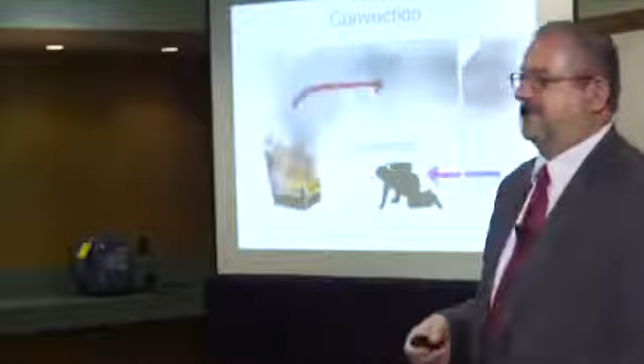But notice where the high heat, high pressure gases are exiting out the top. So one might imagine that if you were where the red arrow is, that could be bad, right? The heat transfer to you is going to be increasing. So if the hot gas layer comes down to where you are and is flowing over you, you're in trouble.

Conduction. A lot of times we just think about conduction being where you're touching something, your gloves on the floor or on a hot surface, or your knees crawling on a hot floor. But the other thing to remember is, how does your gear protect you? Your gear protects you by absorbing energy and storing it. And then what happens? The gear gets pretty hot. What direction does heat flow? Hot to cold. What's the next cold thing? You inside the gear. So at some point, the gear that's pressing against your skin is going to be conducting into your body. So when your gear's hot, the last thing you want is to have it compressed against your skin.

If one of your fellow firefighters gets his trim on fire and you have the temptation to pat it out, you're really not helping him, right? You're going to push the hot gear against the skin and make the burn injury worse. Cool them off. Throw water on them, get the gear off. You've got to get the heat moving away. You want to change the direction of the heat from going to him to going away from him, somewhere cooler.

Firefighting thermal environments. So in the green box there, on the bottom we have heat flux, kilowatts per meter squared, and that's again this radiant energy. And vertically we have air temperature, which will control our convection heat transfer. So we've got convection on one side, radiant heat transfer on the other side. And the key thing to remember is that these two sources of energy from the fire add up, right? If they're absorbed in your gear, they add up.

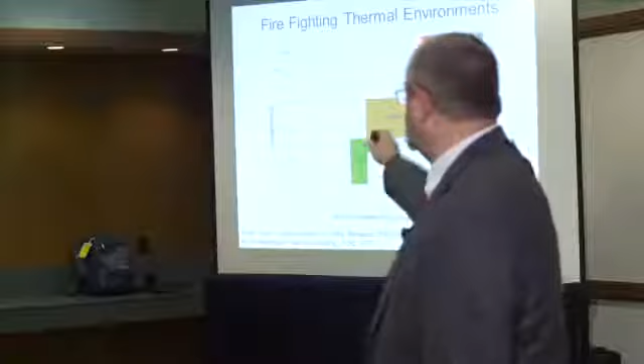So routine case, 1 to 2 kilowatts per meter squared, and up to about 140 degrees Fahrenheit is sort of the routine case. That means your gear can protect you probably for on the order of 10 to 15 minutes under those type of steady state conditions. We get into the ordinary case, and that starts at our sort of 2 kilowatts per meter squared and 140 degrees Fahrenheit, and goes up to a peak of 400 degrees Fahrenheit and about 12 kilowatts per meter squared. Once we get to that upper corner of ordinary, now you're sort of in that kind of 2-minute range of protection.

But part of this depends on how hot were you before you got in that condition, right? And then we have the emergency condition where we're kind of considering that less than a minute, right? You need to be making your way out of that space or changing the condition of that space pretty dramatically under those sorts of situations.

So I'm going to show you a couple of films here. We have a chair that weighs 42 pounds. I've got 2 of them in there, polyurethane foam and polyester batting. And here I've got 1 window and 1 door to this compartment that's about 12 feet by 10 feet by 8 feet tall, and the door and the window are both closed. And you're going to watch the fire develop, you're going to watch the smoke grow, and just under the window you saw a couple of squares on the wall. That's firefighter turnout gear that we have instrumentation in.

So the smoke layer comes down over the firefighter turnout gear. What's happening to the fire right now? Starting to run out of oxygen. The hot gas layer is coming down below the level where the fire can entrain fresh air. So if we don't do something quick, that fire is going to go out. It got hot, it started to build a little pressure, smoke started to force its way around the cracks in the doors. You see it pushing out there a little bit. So we're going to open the door.

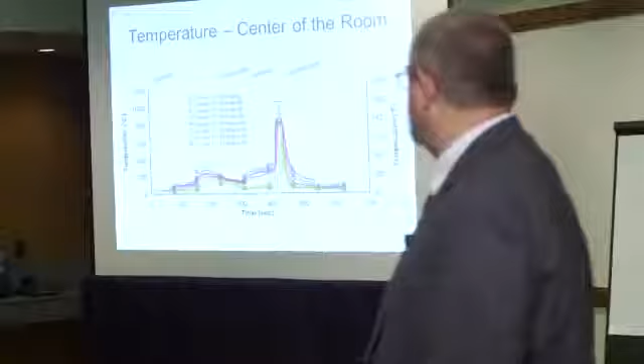So here we have a graph. I'm going to show you a number of graphs. So basically we've got the temperatures starting from 1 inch below the ceiling, the blue line. Then we come down a foot, and then they're every foot until we get to 1 foot above the floor, which is that sort of neon green line. So you can see that we got to temperatures on the order of 300 degrees Fahrenheit, 1 foot above the floor, within about 3 minutes of ignition. So what's that tell you about occupant viability if somebody happened to be stuck in that room?

Not very good. Notice how the temperatures drop off a little bit until we open the door. Now notice what happens to the graph once we open the door. The conditions separate, right? And you saw it in the video. We once again have a hot gas layer and a cool lower layer. So the temperatures 3 feet above the floor and down, where you would be crawling, are ambient conditions.

They're 100 degrees, just as it was that day when we were running the test. That's the outside air conditions that you'd be exposed to. And life is good, perfect working environment, fully encapsulated in your gear. You're well protected to work under those conditions. You have a little bit of heat flux hitting you, less than 5 kilowatts or so. Life is good until what happens?

Until rollover. Once that rollover occurs and we've got flames rolling the ceiling, the radiation kicks up, the convection kicks up because the hot gas layer comes down, and you see how rapidly conditions change. We go from you being in a safe environment to you being in an untenable environment in about 20 to 30 seconds.

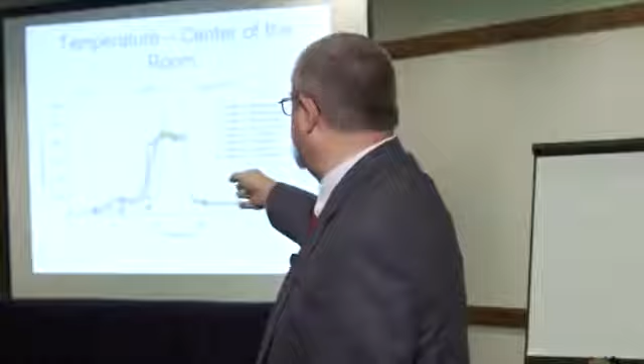So there we see our thermal gradient, our temperatures again from the ceiling down to the floor. Initially, we have temperatures at the ceiling sitting around 390 or 400 degrees. Near the floor, they're ambient conditions until we have rollover. You see they rapidly increase until we reach post-flashover, which would be defined as temperatures in excess of 600 degrees C or 1100 F. That also happens to be the auto-ignition temperature of carbon monoxide.

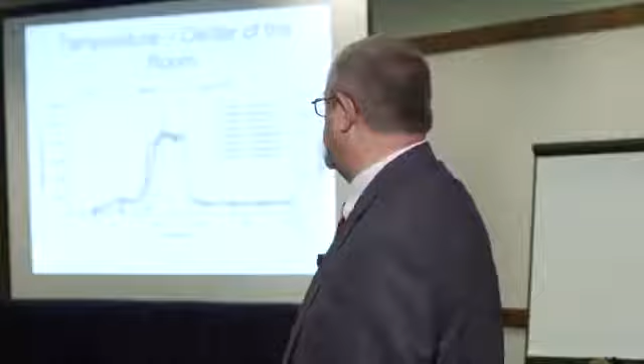So we're sitting at temperatures floor to ceiling in that space around 1500 degrees Fahrenheit. Notice introducing the hose stream from outside drops the temperatures very quickly to about 200 F. Heat flux, again, now we're up to about 75 total heat flux. The radiant heat flux is up to about 30 because we allowed it to transition to flashover.

The PPE temperatures, again, you're okay. The outer temperatures are below 200 degrees Fahrenheit. Inside the gear is less until we have rollover. So when did the hot gas layer come down over the turnout gear? At around 180 to 200 seconds. Well, there you can see it in the graph. Right, so as soon as those hot gases start impinging on your gear, your time of safe operating is gone. You need to be moving or changing the environment.

Flow path. So basically, flow path is the volume in a building, a series of rooms or hallways or corridors or stairwells, that's between an inlet and an outlet. So I got some gray hair in here, so some of you guys might have been hot rodding back in the day, right? So if you consider the fire structure as your internal combustion engine, and your inlet was your carburetor, and your outlet was your exhaust system, if you wanted to get more energy, more horsepower out of that car, what did you do? First time you got your check from working at Safeway or whatever, what did you do?

You had to go get some hooker headers, man, and some glass packs. Got to let it breathe, right? Got to open up that exhaust. Got to get that Holley 750, you know. You got to get that big carb on there to increase the flow path. Make the engine a better air pump and fuel pump and let it burn better. Well, that's really what we're talking about here with the structure.

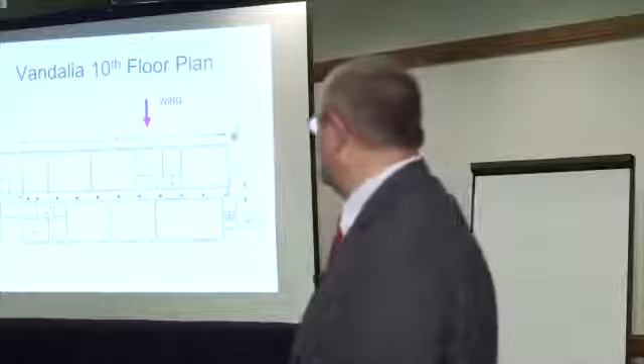So the first hose crew gets burned, they can't advance the line. Eventually, they advance a 1.75" line and a 2.5" line down the hall, and unfortunately not in time to save the other members. So this is what the hallway looked like between the fire apartment doorway and the attack stair doorway. This is looking from the front door of the apartment into the apartment.

So you see that the apartment, although it wasn't heavily furnished, it had a sofa or two in it, and basically a wood dining room set, again lightly upholstered. It had burned long enough it got back into the wall and picked up some foam insulation that was burning on the outside wall as well. It burned hot enough that it spalled the ceiling planks that formed the ceiling of this apartment. So a lot of energy was released.

So before our Fire Dynamics Simulator even had its name, we ran a model with it. The blue box represents the wind, and the fire apartment is right in front of the blue box there. And this is the little old man's apartment, and then of course we have the stairwell on the opposite side. So what you'll see is when the window breaks, the fire size is going to increase and smoke is going to start to move down the hall.

And because the roof man said that the flames were pulsing in and out of the window, I assumed that the wind was fluctuating. So when I modeled it, I had the wind go up to 20 miles an hour and then back down to 0. So every time you see a wind pulse in the model, flames and heat will move down the hall.

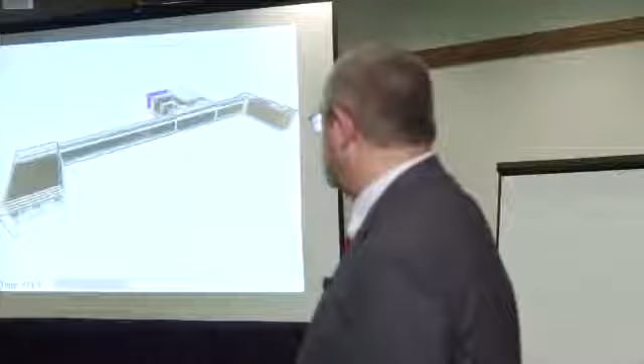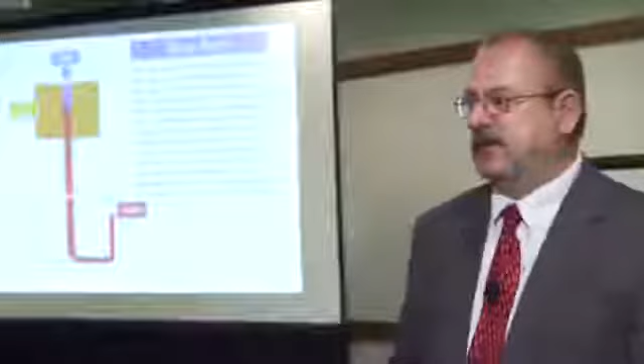So 10 years later, we get an opportunity to run a project to really study this wind-driven fire phenomena. And as I described a little bit earlier in the class, we have this flow path where basically we have the bedroom, we have a hallway, we've got a target room here, there's a hollow core door between the target room and this hallway, and then the living room and our outlets, non-flow side and flow side.

So I'm going to go through this again quickly, reminding you that you only need one piece of furniture to flash over, to have enough energy to flash over a typical residential scale room. And we'll watch this video again. So again, our fire starts here in the bedroom. We have our plume starting to impinge on the ceiling. Ceiling jet moves across the ceiling.

Once it hits the walls and forms the hot gas layer, it starts to build up in depth and then spread down the hallway and into the living room. And notice that when it starts to flow out the doorway into this corridor, it's going to head for this vent, right? The flow is very directional away from the camera toward the vent, part of the flow path.

Right now, if you were to get there right now and start to make an attack and work your way down the hall to get to the fire bedroom, this is sort of that old school early growth stage. You're there in time. It hasn't gone into a decay stage yet. But now that's transitioning to a decay stage.

And as soon as this window, which might fail accidentally or might be ventilated as a ventilation tactic, look at what it does in that hallway. Right? It's no longer a hot gas layer, cold layer environment. Now any firefighter that would be in that hallway is in that hot convective flow. Heat transfer to that firefighter increases dramatically.

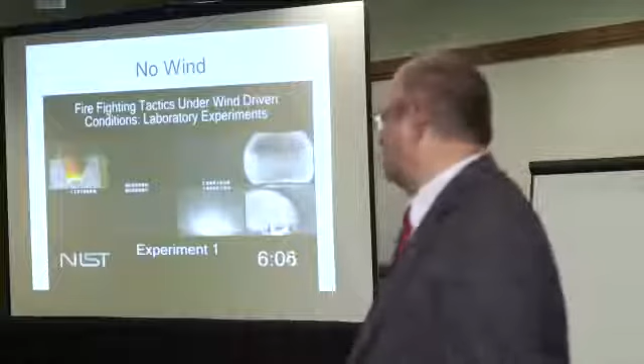We're going to watch the hollow core door fail. Interestingly enough, until that door fails, somebody would have a chance of surviving behind that door. Right? So from a victim's perspective, having a closed door, doing whatever compartmentation you can, is a big value. Notice how that flame is pulsing in and out. Now this is with no wind.

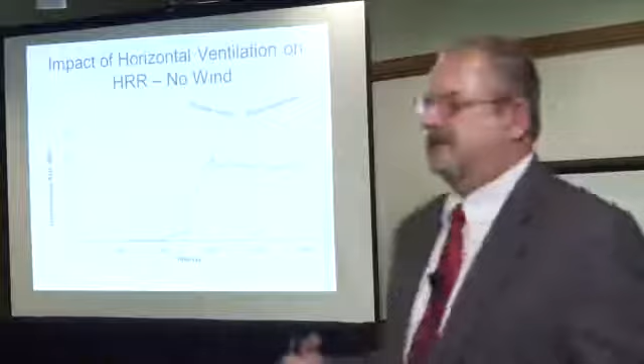So again, very dramatic increase in heat release rate. It goes from about 2 megawatts to 13 to 14 megawatts within 60 seconds. The bedroom temperatures: initially, we had over 1,000 degrees at the ceiling and about 500 degrees at the floor. Once the windows vented, now floor to ceiling, we're post-flashover. We have a very well mixed fire going from floor to ceiling in excess of 1,100 degrees Fahrenheit, and it stays that way until suppression.

The living room temperatures. So what's happening in the living room is there's not really a lot of fire in the living room. Why not? There's temperatures at the ceiling that are about 700 degrees. They're pretty warm. So what's going on is the temperatures and the heat flux in the living room are hot enough to start to pyrolyze the furniture and the carpeting that are in the living room. So gaseous fuel is being created, but it doesn't have any oxygen down there to burn.

Then when we vent the window, it starts to pick up some oxygen, but it's still burning pretty inefficiently because, you see, we're not post-flashover yet. We still have a temperature gradient, although now the ceiling temperatures are about 1,400 degrees Fahrenheit, and near 1 foot above the floor, it's about 800 degrees Fahrenheit. When that door fails to the target room, the chunk of oxygen that's stuck in that target room gets pulled out into the hall, and that's what causes this increase in temperature here, and then we sort of transition to our flashover state.

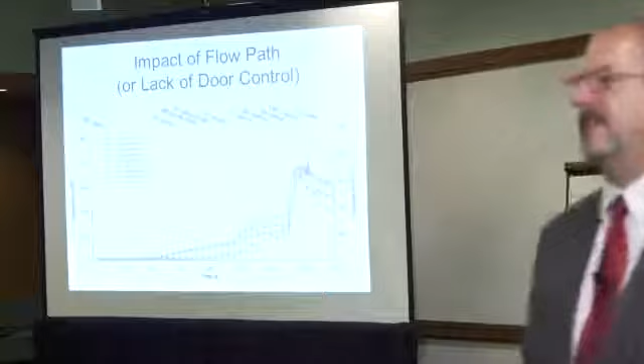So again, now we're working with the fire service. How would you attack this fire? Well, we're going to go in, we're going to open the lobby doors, chock them open. We're going to get to the stairwell, attack stair, we're going to chock it open. We're going to go upstairs, we're going to open the bulkhead, or we're going to get our attack crew set for the stair. And then we start changing it to see how we could make it better. In this case, this graph is just showing you temperatures in the corridor between the fire apartment, which has an open door and wind blowing in the fire apartment, and the bulkhead and the stairwell door.

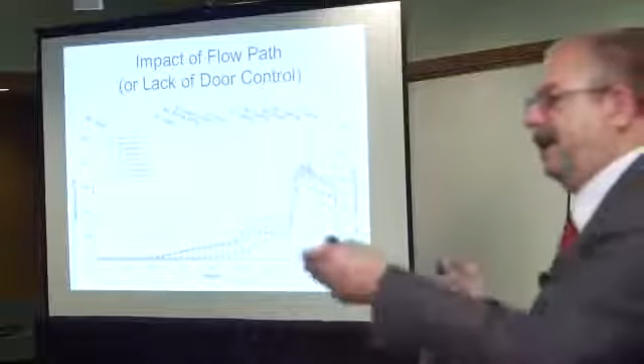So this is stairwell 7, the door's closed. The bedroom window is failing, so now we're going to have the wind having an impact. They open the stairwell door a little bit, and you see the temperature in the hallway increase as they start to complete that flow path. Then they open the stairwell the rest of the way, and we open the bulkhead, and that provides our exit.

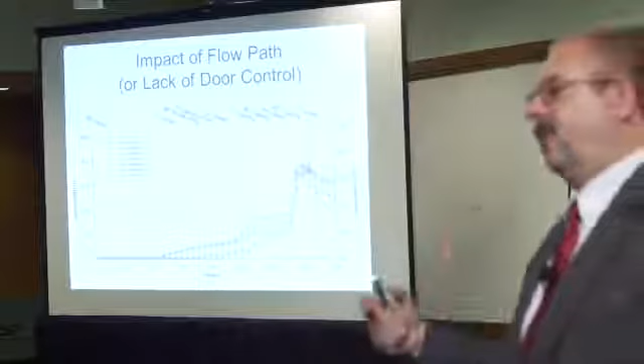We open the damper on the end of the exhaust in the wood stove, and you see how rapidly the temperatures in the hallway outside the apartment increase from something that might be tenable for a firefighter to work in for a short time to something that's completely untenable for a firefighter in full protective clothing. And you see the time it happens. Each one of these marks down here is 10 seconds. So it's happening in the space of less than 20 seconds.

Very rapid transition. This isn't just a high-rise issue. Single-family homes. Here's an incident that happened in Houston. Killed a captain, very experienced captain, more than 25 years on the job, as well as a young firefighter who was 30 days on the job, and this was their first fire.

The wind was coming from the rear of the structure, and there was so much smoke in the street in front of the house, and when the fire department arrived, fire sort of happened in the middle of the night, the engineer stopped because he didn't want to hit any parked cars. He wanted to get a better view of where he was going. And then he took the apparatus down the street past the house. They hooked up to a hydrant, and the lines start going in the front door on the downwind side.

Now, this was a very difficult house to gain access to the rear. Again, some confusion about whether people were in the house or not. In fact, the occupants were out of the house, and they had opened the garage door to the house to get their cars out. So again, another opening on the downwind side.

So here's the front door. The nozzle from the victims was found here. Their line went down the hallway. Their nozzle was found here. And the 2 firefighters' bodies were found in this location here, so they were well off their line.

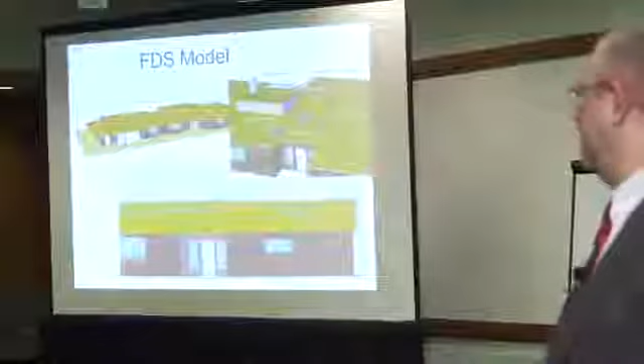As soon as they were done with their cut and punching down the ceiling, he looked back again, and now he saw that that flame overlapping the eaves was about 20 feet wide. Well, that's because all that glass, solarium glass, had failed. So again, we're modeling this fire to try to get some understanding of what the flow path looked like and what happened. In our models, we include the roof vents. We try to get the whole timeline down for when they're pulling the ceiling and that sort of thing.

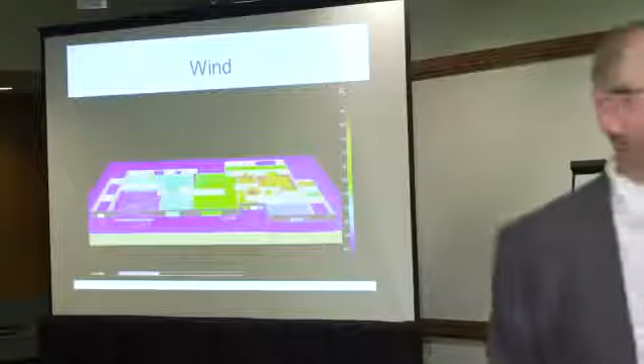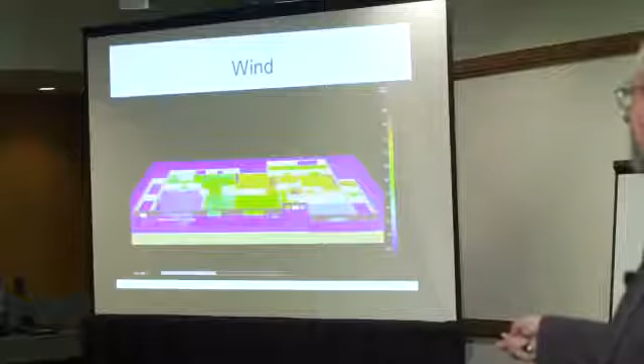And this is what it looks like. So the graphic on the side, anything that's red or above is 500 degrees Fahrenheit or above. So not healthy for a firefighter. Our slice line here is about 3 feet above the floor. Here's our garage door that's open. The door between the kitchen and the garage was also left open by the occupants. And then this is the door the firefighters are going to open to make entry. The wind is coming from this direction.

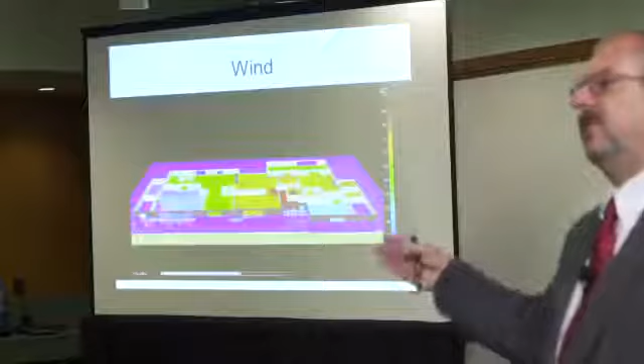So the front door is open. They open the door, and then what? Well, you got to get your mask on, get your helmet on, whatnot. Again, this is an issue. When are you making the vent? Right? You don't want to vent till you're ready to take some action. Or if you're going to open the door and take a look and you see conditions aren't so good, close the door again. Right? Don't allow the fire time to build up by entraining more air.

So things are heating up. In fact, opening the door, you're going to see when they make the roof cuts right in the foyer area, it'll cool off a little bit. They'll get a little bit of lift. So now the roof is vented. It cools off a little bit in this area.

Things are working. And then the glass fails. And now you see where the heat's going. So they couldn't stay on their line and follow their line out probably if they wanted to. They went to an area that was not as hot. It just wasn't cool enough for them to survive.

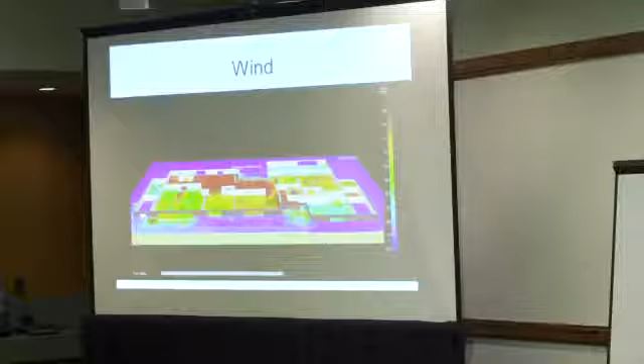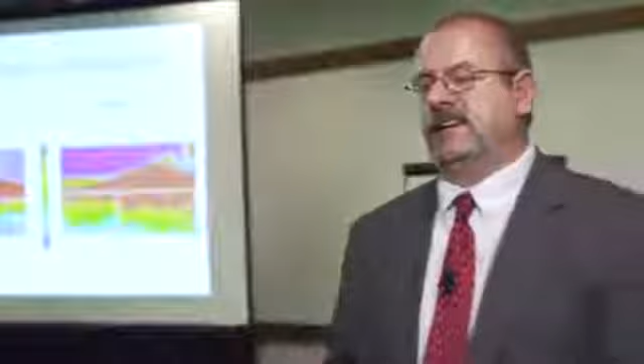So this is a side view looking at the front entry. So the view on the left is before the wind is impacting it. So you see it's cooler, close to the floor. You could crawl in and under there. Once the wind is blowing through the house, it's dropping the heat, it's mixing it toward the floor. You can't get low enough to get out of the thermal flow. And perhaps more importantly is the velocity of that hot gas.

Before the window breaks, 3 feet above the floor or so, fresh air is being entrained inside that front door, bringing cool air into the house, also feeding the fire. But if you're in the location of the doorway as a firefighter, it's going to help you. It's going to help keep you cool. Once the glass breaks, notice what happens. The flow reverses and hot gases are coming out at that same location. Again, no escape.

So wind. Keep the wind at your back, stay upwind. Otherwise, you're literally putting your crew at the mercy of whether this glass that's less than a 1/4 inch thick is going to break while they're in there, or whether somebody from another company in an uncoordinated manner makes a vent and puts them in harm's way, puts them in the flow path.

Again, just a top-down view. This is the direction of the wind out to the front door and out through the garage. So they couldn't go this way, they couldn't go this way. There were security bars on the windows here. They got to the best place they could and couldn't get any further. Again, you'll see where the flow path is because that's where most of the burn damage will be, because that's where the oxygen's mixing with the fire.

So it brings us to some questions about ventilation. Can you really vent enough? So here was an incident that occurred in New York City. Rob Weedman was burned in this incident, as was firefighter Gersbach. And the fire started upstairs in the rear. The fire marshals from New York City said that it was a hair roller, curling iron that was left in a pile of clothes, started on fire.

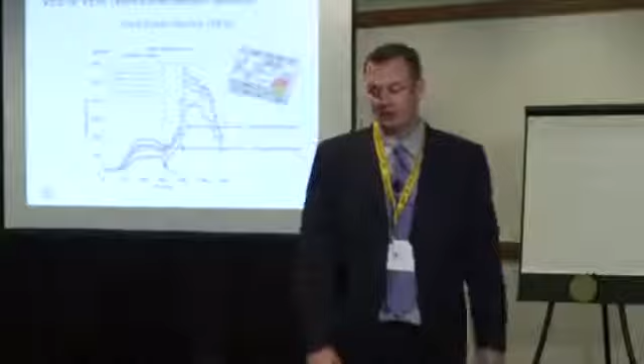VES, or as people bash me for, VEIS. Apparently putting an I in there ruined the fire service. My argument would be, well, let's take the E out because everybody knows if you vent, in order to search, you have to enter. I don't think everybody's teaching that you need to isolate that door. And I think putting the emphasis on that isolation is extremely important because if you don't isolate that door, you put yourself in the flow path.

The problem is you put yourself in the opposite end of the flow path. So now even if you're a level above, like we show in this scenario, you're trying to crawl down the chimney. And I think we've got the video here that we showed this morning.

How many people have a VES? How many people have a VES SOP? A lot of you should. There should be more hands because there's going to be the scenario where you show up and there's a credible rescue that needs to be made. There's a person right there in that window and your people need to know how to do that.

They need to know. And one of the things that I see taught all the time that scares the heck out of me, people teach throwing the tip of the ladder through the window. And the problem I have with that is the moment the tip of that ladder goes through that window, the clock started. And that clock is how long you have to get that door shut before you made that room untenable for the person that's in there and any firefighter that's trying to enter into that window.

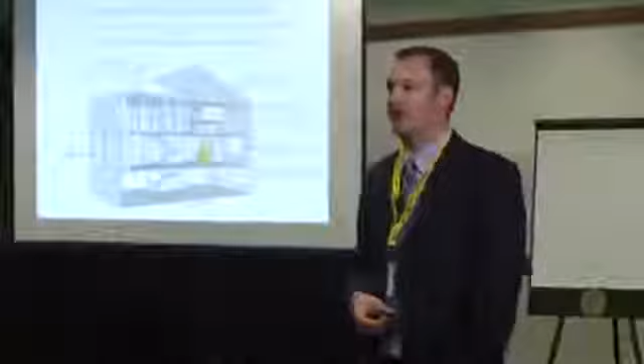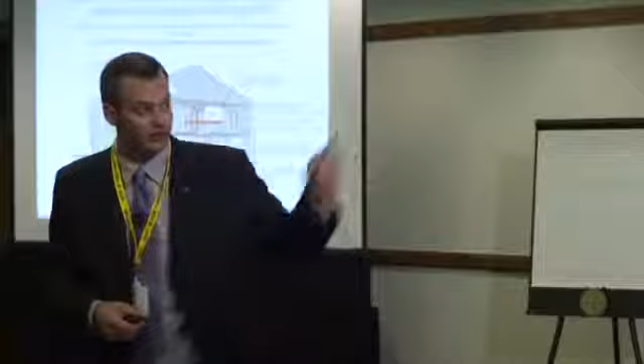Dan talked earlier about convective flow. That 170 at the floor with a 12-mile-an-hour wind feels a hell of a lot worse than 170. But with 0 miles an hour and 120, you're now talking something that you can operate in. Best chance of victim survival and firefighter survival is behind a closed door. You can have, and Dan and I have seen this on many experiments, the entire front half of a structure absolutely blowing fire. And if somebody's behind a closed door, let's say on the CD corner, there's a chance that there's a savable life inside that room. They put a closed door between them and the fire.

Same thing happens if everything goes to crap on you guys and you find yourself having to bail out. One of the best things you can do to buy yourself time is to get a closed door between you and where the fire is. Takes you out of the flow path, allows the room that you're in to actually ventilate and allow the smoke to lift. And if you get to a window, you actually have time until that door burns through to have someone get a ladder to you and allow you to go out through that window.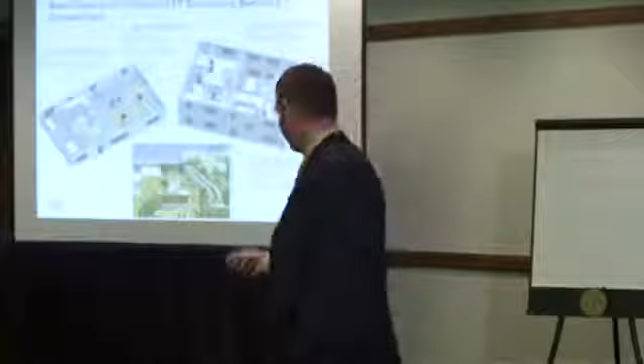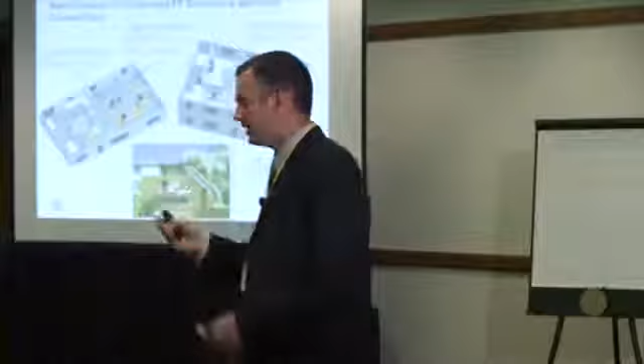We've got a number of cases where firefighters have bailed out through windows on upper floors, and the thought of closing a door wasn't in their head. They're thinking, this is so bad, I got to get out that window. And I've never been in that situation, but I can imagine the last thing you're thinking of, unless you train on it, is getting a door shut. There's been cases where firefighters have waited for their comrades to jump out of the window while they sat there and cooked with the door 8 feet from them, and the thought process was not there to get that door shut to buy them a little bit of time.

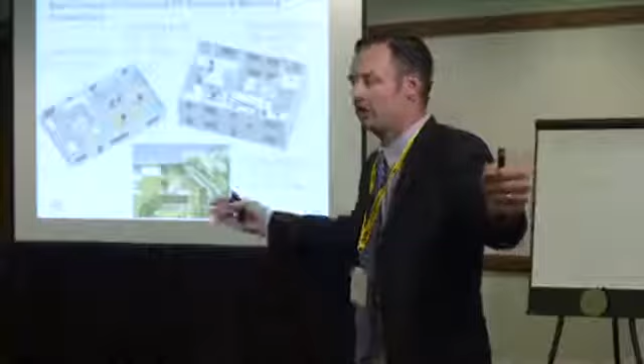Vertical ventilation. We actually wrapped this series of experiments up. The online training program is finished, and we're going to release it next week. So keep an eye out on our website. There's going to be a new online training program that addresses the vertical ventilation stuff.

And for anybody that thought, well, UL's going to tell us not to vertically vent anymore, UL's going to tell us that it's useless. No. That's not what we're telling you. What we're telling you is if you choose to vertically ventilate, here's what's going to happen. If you choose to do it this way, this is what you might see. Here's the timeline of which things happen.

In this video, what we're showing is the impact of different hole sizes. And the learnings out of this are no different than horizontal ventilation. I don't care how big of a hole you make. There's so much fuel, and it's so fuel rich, all you're going to do is make the fire bigger, unless you apply water or unless you control the air.

So in the one on the left, we open a 4x4 hole, or 16 square feet. The one on the right, we open a 4x8 hole, or 32 square feet. What you're going to see is air comes in low. In one scenario, we get flames 15, 20 feet out of the roof. In the other scenario, we get 15, 20-foot flames out of the roof. And we get fire out the door. The fire is producing more energy than you can let out, even with a door and a large vertical vent.

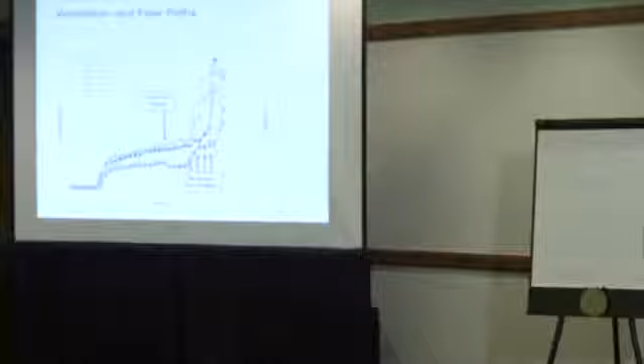Ventilation and flow paths. If you're not going to die by falling through the floor, the next chance of dying is being in the flow path between the fire in the basement and the first floor. How many people have made it down the stairs into a basement fire and put a basement fire out? I would hope a lot of hands go up, right? We've been very successful doing that. But do you know why?

Either the fire was small, it ran out of air so it wasn't that big, or the basement wasn't ventilated, so it was kind of like holding your thumb on the end of the straw and didn't allow the flow to come up past you because there was no air low. These are important things. You might be a piece of glass or one door being forced away from being caught in a flow path between the basement and the first floor.

We had a couple of brothers, Cherry Road in Washington, D.C., a couple of brothers, San Francisco, Diamond Heights fire, where they never opened up their hose lines. They got caught in the flow path above the fire or between where the fire was and where the fire wanted to go and got dropped and didn't get back up because a vent occurred on the floor below them while they were trying to find the basement stairs and make it down the basement stairs.

And this is what the temperatures did. In this scenario, they're going from about 250 to 1400 just by making some vents in the basement. And I think the common conception is, well, I'm going to let the hot stuff out of the basement, and if I let the hot stuff out of the basement, things are going to get better on the first floor. The opposite happens.

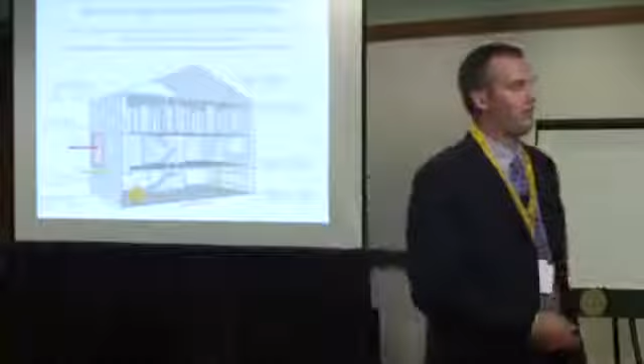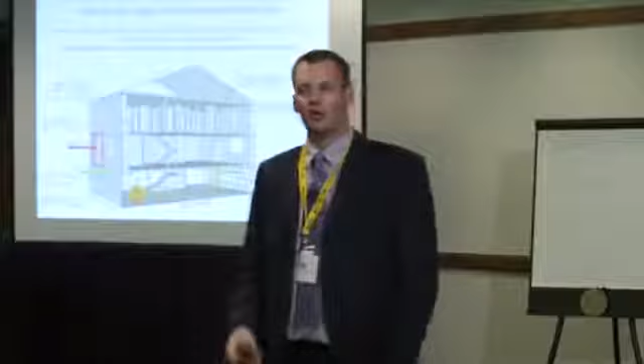We always teach that water expands 1,700 to 1 and creates a lot of steam. The piece that we don't focus on too much is how much the gases contract when you take them from 1,700 to 300, 800 to 300, 1,200 to 400. That many hundred degrees of temperature drop will contract the gases. So you don't get a giant burst of steam and heat and smoke up to the second floor.

And even if you did get some steam going up to the second floor, look at the temperatures at the top of the stairs, 600 degrees to 200 degrees. So you're seeing a dramatic decrease in temperature. The bedroom on the second floor, remember before it went from 225 to 210? It went from 225 to 190.

Now, because you have the upper hand, you can now vent that second floor and not have to worry about making it a low pressure and being in the chimney. You can vent the heck out of that place because you have the upper hand. You're letting more out than that fire can create. So more operations can happen simultaneously because you have the upper hand.

And another important piece of that is you're flowing water at that window to knock the fire down, not to put it out. You got to get inside and finish it off. If you flow water for 15 seconds and you knock all the gases down and the fire goes back to the contents, and you just sit there and think you're done, the fire will come back. Because you're not putting water everywhere, stuff is still burning. So if you don't get inside and finish it off, it's going to come back.

We did the same thing on the first floor. Fire in the kitchen. What would happen if, as the truck crew is forcing entry into that front door, the engine crew gave the kitchen a shot for 10 to 20 seconds off the ceiling before they went inside? Well, the traditional thought is, I'm going to push all the heat and hot gases into the structure downstream. And you got to remember, there's not a low pressure back there. So there is no flow path that those hot gases can go to. The low pressure is the kitchen window, which is why the fire's coming out that window in the first place.

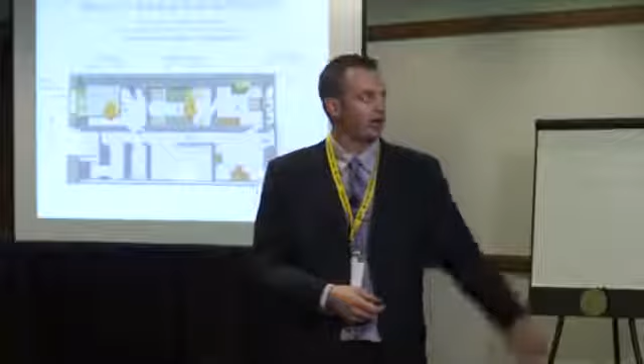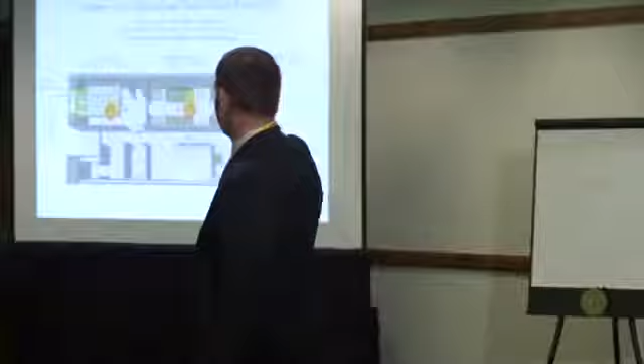Here's what the temperatures look like. The kitchen dropped by 1,200 degrees. The middle room, which was also on fire, that's where the fire started, went from 600 to 300. And the rear room that had no fire in it went from 500 to 300. There wasn't a push, and that's 14 seconds of water. We're looking at those temperatures immediately at the end of that 14 seconds. Did we see a burst of heat go downstream? And we didn't see it.

What if you softened the target on the second floor? What if you went ahead and hit it on the second floor before you went through the front door? Well, 3 feet off the floor in the hallway, using 25 gallons of water at a flashed over bedroom. Fire coming out of the bedroom, hallway door open from that bedroom. What if a victim was laying on the floor outside that bedroom? Well, that's what we looked at. 10 seconds of water, 25 gallons of water.

Tight stream off the ceiling immediately where the water is needed, right in the compartment that's on fire. The fire doesn't know whether the water is coming from the interior door or coming from the exterior window. If it hits the ceiling and puts out the gases of what's flashed over, the low pressure can remain the low pressure. The window can still be the low pressure. Hallway temperatures drop from 273 to 104 in 10 seconds.

If you did that and immediately followed it up by going inside, and you trained on it and you could do it quickly, is that delaying the safety of the occupants inside the house? Something to think about.

4 points to consider. Just like any tactic, there is a right way and a wrong way to apply water from the outside depending on what you want to do. If you're going to open up a fog stream at a window that is a low pressure, the reason the fire is coming out is because that's the low pressure.

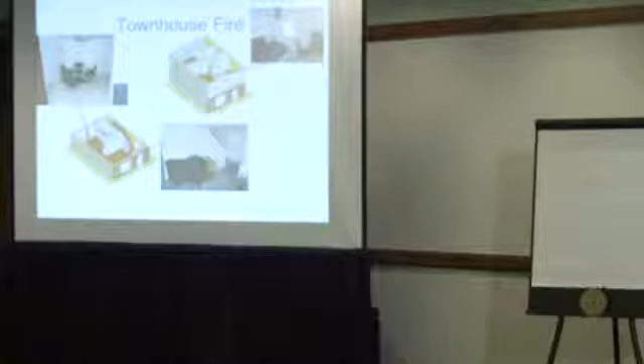We will do that. We're all good?

All right. Townhouse fires. Working with the city of Chicago. They had some townhouses, identical townhouses, 20 of them, in pretty good shape that they wanted to burn. So we started each of the fires in the sofa that you see, that nice blue sofa there in the front that was in the front living room. In the rear on the first floor, we had a dinette set, again, kitchen cabinets, more fuel there. Upstairs, we had the bedrooms furnished.

We had two doors that were open to bedrooms, one, the bedroom in the rear at the top of the stairs, and the front bedroom that you see the red arrow to. And then the other bedroom had the door closed all the time up on the front. So each one of these, we went through and all we did was change ventilation, and then we hit the fire from the outside.

So in this first case, everything's closed. We see the fire developing. We talk about the fire dynamics again. You know, the fire plume's coming up. The ceiling jet is going across the ceiling. You see the smoke spreading into the lower rear right corner there. That's the kitchen and the dining room. You see smoke coming up the stairs. The top middle image is the open bedroom at the top of the stairs. And then the top right image is the image that goes with the front bedroom.

So right now there's no openings to the exterior. There's no bedroom windows open. The front door's not open. We see that the flames are starting to roll the ceiling in the first floor in the living room. You see we have smoke floor to ceiling in the bedrooms at a little over 3 minutes. Notice that what do you see from the outside? Because the heat is built up inside, the pressure is built up inside. For a little while there you saw smoke push around the edge of the door, and now you see nothing. Right? The pressure dropped. As Steve said, the smoke, the gases contracted.

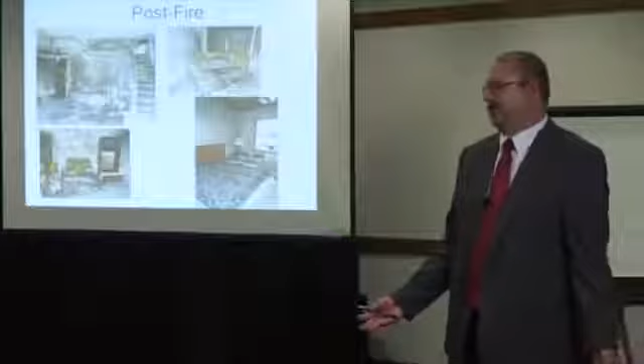No burning upstairs in the bedroom. We're not going to spend too much time on looking at the data here. Just this is the living room, this is the kitchen, the hallway, and the bedroom. The fire goes up at the ceiling. We're 1,500 degrees. 1 foot above the floor, we're over 400 degrees. Untenable there. The temperatures all drop down below 400 degrees.

The front door is open. The temperatures jump back up to 1,500 degrees at the ceiling, 400 degrees at the floor until they increase a little further. We hit it with the line, drop them down. Similar pattern up and down throughout the house. The only difference is the magnitude.

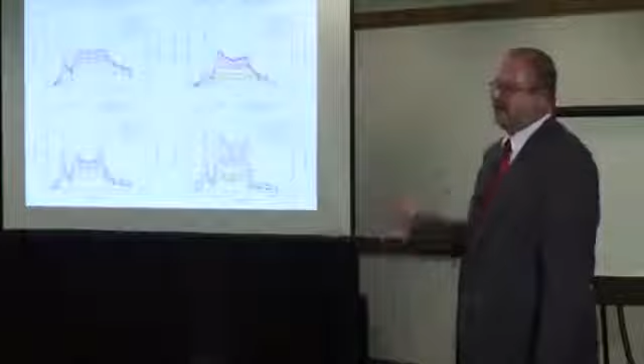So in the front bedroom, we had temperatures at the ceiling at 600 degrees and 1 foot above the floor, only about 100 degrees. From a temperature perspective, laying on the floor, laying on the bed, maybe survivable. But gas concentration, what do people typically die of in their home first? Right? Smoke inhalation, toxic gas throughout that house very quickly.

So now in this case, same kind of deal. We light the fire in the same place. We're going to leave the door closed. And now when we open the front door, we're going to follow that very quickly with a firefighter with a pike pole taking out that front window. And watch how fast things transition.

Again, the fire's building up. You see how rapidly smoke is filling the bedrooms upstairs. So we're 1:30 after a small flaming ignition on the sofa. Has anybody even called you yet? Not likely. Smoke down to the floor at the bedroom that's at the top of the stairs. 3 minutes. Watch this frame here.

We have such a pressure differential that what's going to happen here is the fire is trying to draw air. The gases are shrinking upstairs, so they're cooling off, and the pressure differential between the basement and the first floor is enough that it pulled the basement door open in front of our camera. So that pop that you saw was the basement door whipping in front of our camera.

So the front door is open. It's 4 minutes, 30 seconds. They vented the window. You see how rapidly that transition's occurring because this is such a fuel-rich environment, it really wants a lot of air. Before, we were waiting for minutes before it transitioned to flashover. How long did it take here? About 30 seconds.

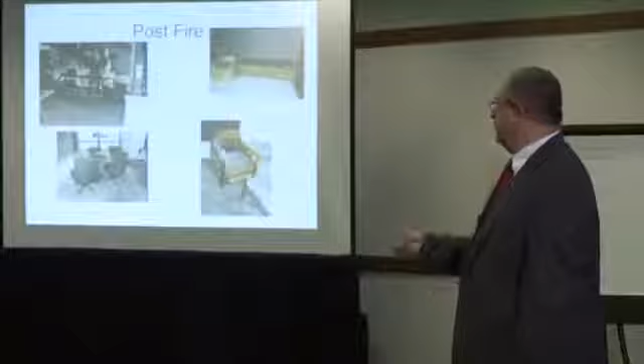Opens the front door, you see that tunneling effect that was mentioned before, that fresh air, that gravity current being pulled in, that oxygen adding to the hot fuel and increasing the heat release rate. And then within that 30-second time period, transitioning the living room to flashover. Again, fuel in the kitchen, was it on fire? Nope, there's no oxygen back there. High pressure area with no oxygen. We can't push the fire with a hose line, and we can't get it to burn because there's no oxygen back there. Again, we have the up and down like we had before.

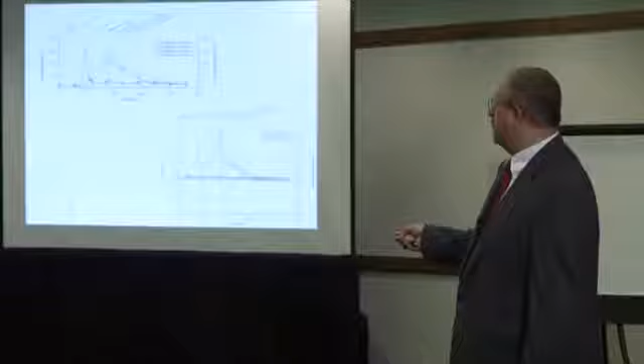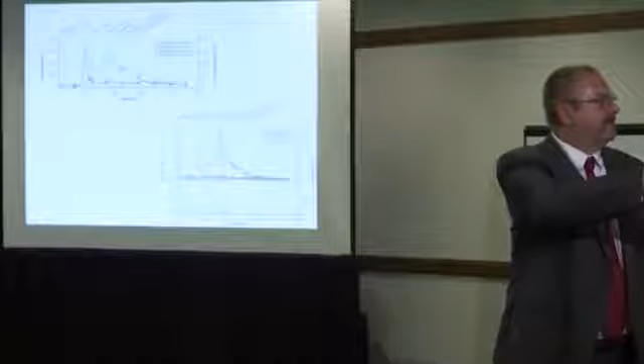Once again, notice when the hose stream goes in the door, even in the flow path here, all we see upstairs in that upper bedroom is a decrease. We never see a spike of heat going up the stairs. This is at the bedroom window. We have temperatures up to 600 degrees going out of the window. Then they drop down. We open the door. They pick up again to about 500 degrees. Here's the velocity. The velocity out the window is about 12 miles per hour down here, and it's a little hard to see, but before we open the door, the velocity actually goes negative because it's sucking back in the window trying to get to the fire.

Now we're going to switch gears and go to some single-family homes, wood frame construction, burns that were done with the Spartanburg Fire Department and ISFSI. So we're looking at size up. Size up is very, very important. So here they have a wood frame structure, about 1,000 square feet. We have the fire officer walking around with a video camera and a thermal imaging camera that are literally taped together and seeing what he can see in his 360. So the idea here is nothing's opened up. He's got smoke coming out of various locations in the house. They're going to go to the hot spot, vent the window, and introduce water in that window. So it's pretty clear to him here where that energy is localized.

So they're going to break the window, and ideally we'd flow water right away. But in this case, we're going to let it sit for a little bit so we can get a sense from the thermal imaging camera that the energy level is increasing in that room of origin as air gets in there. And then we're going to hit it with some water. Unfortunately, a very pathetic stream of water initially due to some hose kinks. But you'll see, even at that, it has a tremendous impact.

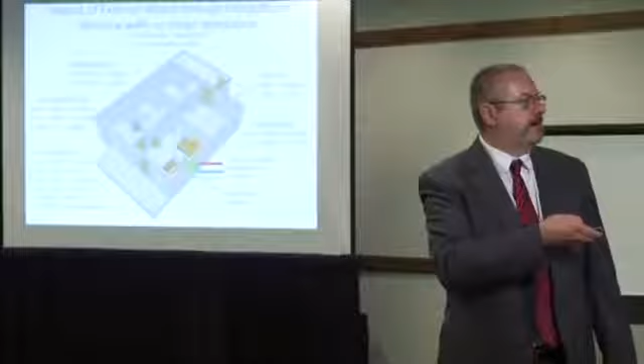Then we apply water through the window, and what happens in the front room? It goes from 700 degrees to 100 degrees near the ceiling, 200 degrees to 70 degrees at the floor. The rear bedroom, temperatures don't change much. Again, now's the time to vent those windows and let cool air in, or vent the front door, let some cool air in. The front bedroom has stayed tenable the whole time in terms of gas concentration and temperature.

Now we're going to look at a different case. In this case, same kind of house, same kind of furniture, except we're going to have the front door open at different periods of time here. So you have the interior view, same scenario as we had in the previous fire.

Again, hot gas layer is going to build up. The fire is going to darken down a little bit. You're going to start to see smoke pushing on the outside of the house. So look at the outside view. Think about size up, what you're looking at from the outside versus what the conditions might be inside.

This furniture was burning extremely fast. This was brand new furniture. We were worried the fuel literally wasn't going to last long enough. So what you're seeing, this glow here, is actually from a 500 watt halogen light in the corner. The fire's really darkened down pretty well.

These are old homes, but in the fire rooms and adjacent rooms we installed new windows, thermal pane windows. These homes are built in the 1930s or so. So now we have the initial opening of the door. That helps the fire pick up. You see that it's starting to self-vent out of one of the windows. Vinyl frame, basically it's burning around the frame.

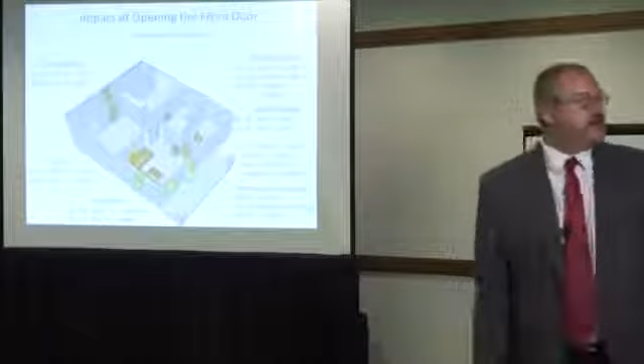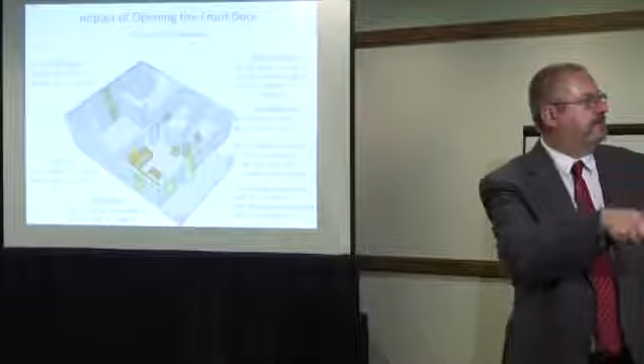So here's what it looks like, the impact of opening the front door. We certainly increased the temperatures in the living room from 1100 degrees to 1400 degrees. Temperatures in the kitchen increase. Rear bedroom doesn't change too much. The middle bedroom goes up a little bit. And then the front bedroom, you see the temperatures are increasing from 80 to 90 Fahrenheit.

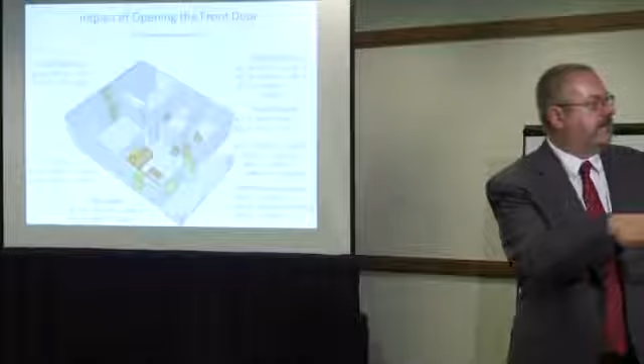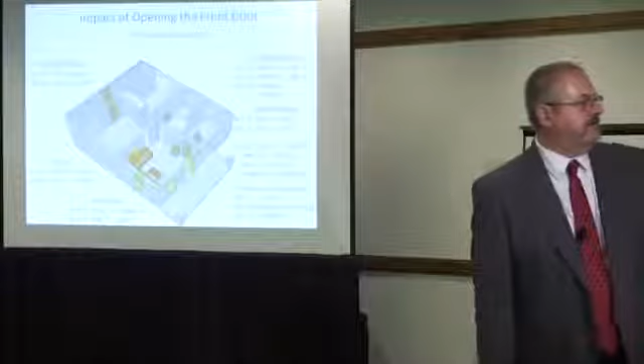And we still have plenty of oxygen, no CO or CO2 to speak of, but the heat flux is going up a little bit. We also had thermocouples on the doorknob, because sometimes you want people to be touching the doorknob and all that sort of thing. So the doorknob in the room went from 100 degrees Fahrenheit to 200 degrees Fahrenheit, and on the fire side it went from 700 F to 1200 F.

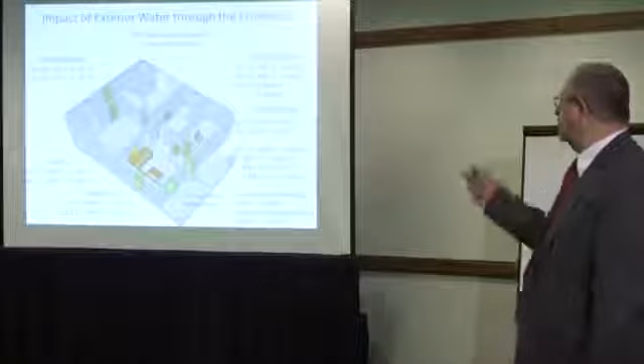Impact of water through the front door, dropping the temperatures throughout the space as you've seen before, and again the front bedroom, even though we had fire rolling the porch and everything, remains tenable. Show you one more scenario here. Again, size up, so you've got smoke showing. Where's the fire?

So the 360, again, extremely important to see what you have.

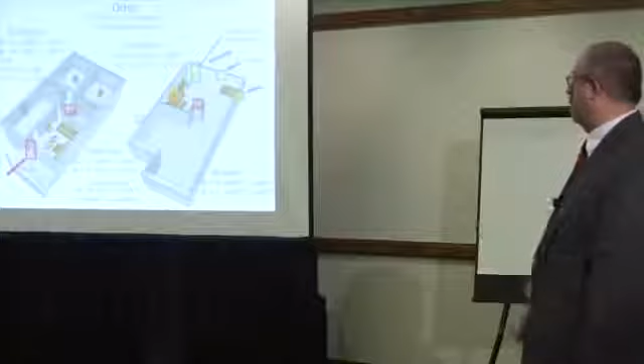Again, we attacked it from the rear on the level of the fire, so we weren't working over the fire, and it dropped temperatures significantly. We also had a simulated firefighter in there where we were looking at turnout gear temperatures and things like that.

And now for the last segment, I'm going to turn it over to Derek, who's going to tell you how we put this in practice. Yes.

Now, I wanted to finish with my story of me attending the lecture at FDIC in the big lecture hall. So there was about 1,000 people. I was one of 1,000 students there sitting. Well, I had attended that session because I really did want to hear from the fire service leaders about what they thought of this new research that was out there.

I had prepared for this lecture, basically, reading through a lot of the documentation that Dan had published, as well as Steve. And I had numerous conversations with these guys as well before that FDIC in 2012.

So as I was sitting there, and the conversation turned to the research that was being done and the negative vibe that was being put out there by the presenters, I was sitting there thinking, damn, are you serious? Like, have they not read the research? And I was starting to get a little agitated in my seat. Meanwhile, people all around me started cheering as if it was some sort of religious revival.